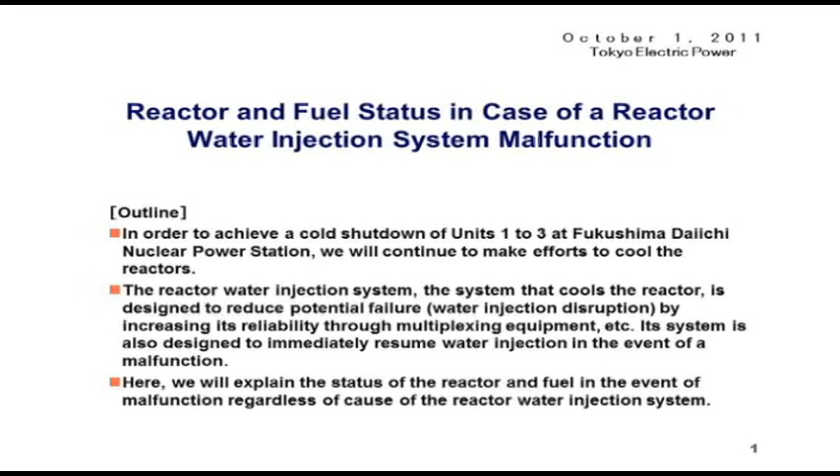Basically, we have backup facilities for the feed water system, such as spare pumps, emergency power source cars, and firefighting vehicles, so that we will be ready to restore the system immediately. Today, we will introduce what will happen and how we should respond when the system does not function in spite of those backup facilities. As illustrated at the bottom of the slide, first let me explain some of the images depicting the state inside the reactor when the feed water system is disrupted. Given that this is just an image, please understand that this is just a rough depiction of the state at the bottom of the RPV.

First, at present, the words normal time are displayed on the left-hand side. However, we estimate that the damaged fuels dropped down to the bottom of the RPV. At present, it is both through the water injected and the water leaking out through the bottom combined with its evaporation that we are able to remove the decay heat. Therefore, we presume that the current temperature and pressure level of the RPV are well balanced between the amount of water injection and the combined amount that is evaporating and leaking out.

Please look at the illustration in the middle. If the water injection is disrupted under any circumstances, the water level will lower due to the shutdown of water supply. As a result, the amount of fuels exposed increases. Following this, we presume that the longer this state continues, as described on the right-hand side, the amount of water will almost reach zero, and the amount of exposed fuel will increase further, raising the fuel temperature.

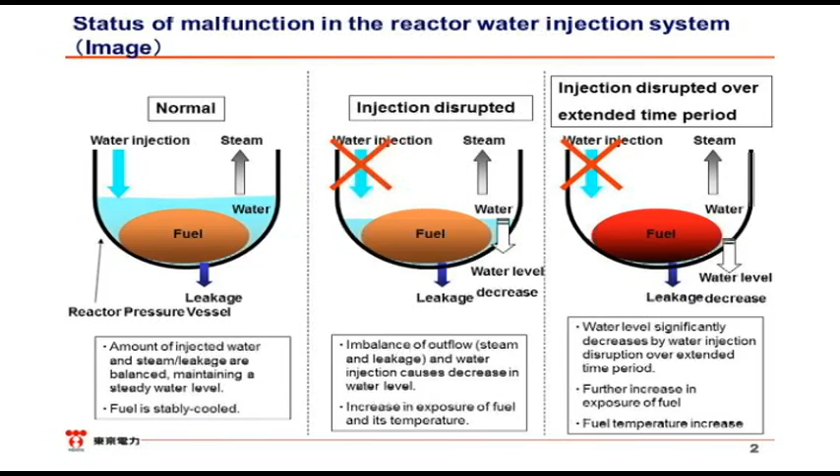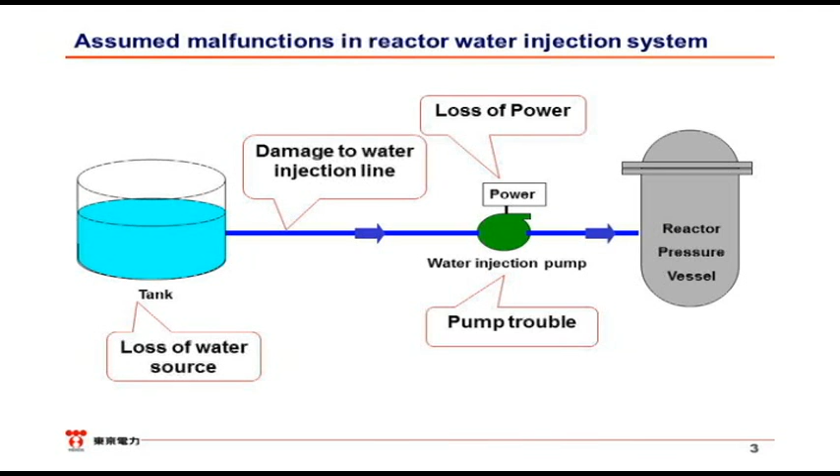We will describe what we think occurs when the water injection system fails. In principle, we will continue the water injection sourced from the water tank via the use of a hose through the injection pump into the RPV. We think the possible reasons for the failure are as follows: pump trouble, problems at the system that supplies electricity to the pump, damage to the feed water line that leads to water leakage, and as for the water tank, the loss of the water source that supplies water for injection. In case of failure, let me explain our response measures.

First, when pump trouble occurs, we start up a standby pump or activate an emergency pump that has been installed on the upland grounds. Second, in the event of AC power loss, we will resume operations of the emergency pump that we have on the upland grounds or restart water injection by using a firefighting vehicle that doesn't require electricity. Upon the loss of the water source, we switch over from the buffer tank to the filtrate tank in order to resume the injection. Though we didn't put it here, we have another injection tank so that we can attempt a water injection just in case.

If the feed water line was damaged, we resume water injection via a pump that is installed next to the pure water tank or via a hose that we have prepared for the accident along the regular line. As we have described so far, in the event of a single failure occurring, we are able to restart the injection within approximately 30 minutes.

Relating to the evaluation of the reactor situation in the event that water injection is stopped, we assume that all of the decay heat contributes to the increasing fuel temperature based on the conservative evaluation of the condition that the reactor was in an adiabatic state. Actually, we expect that heat removal of the fuel will be achieved due to the evaporation of injected water since the water injection stopped, as shown in slide 2. Meanwhile, this time we conducted an evaluation based on the condition that all heat released in the reactor contributes to increasing fuel temperature as soon as the water injection is disrupted.

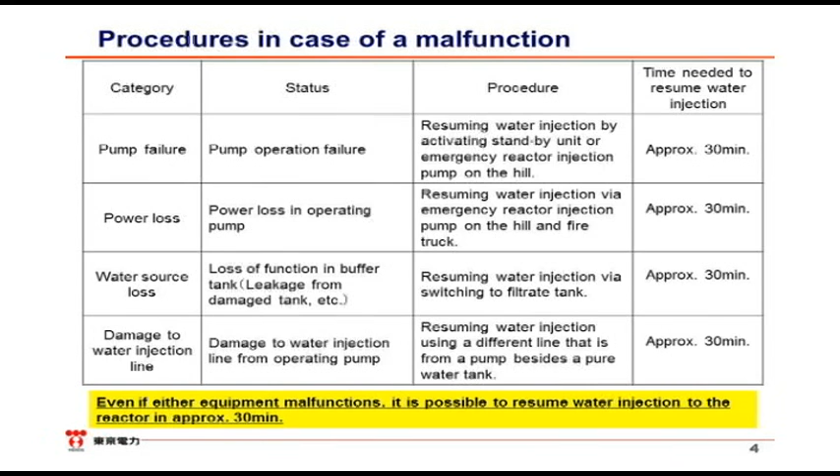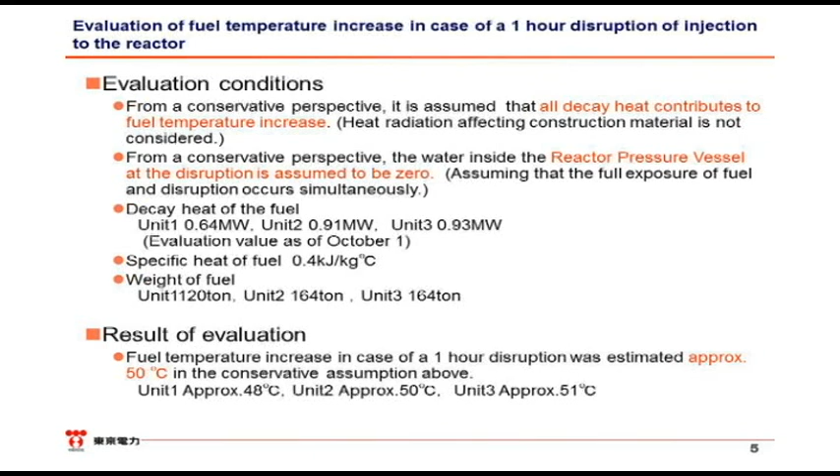Although we explained that we will resume water injection approximately 30 minutes following the disruption of water injection, we additionally explained how we would respond in the event that multiple facilities were damaged, as shown in page 6. We have to resume water injection by relocating fire trucks or hoses in the event of a tsunami hitting again due to a strong aftershock that destroyed multiple facilities.

According to this flowchart, after the functions of the multiple facilities were lost, we relocated the fire trucks, confirmed the current situation of where the hoses had been laid out on the ground, and conducted an environmental survey. After that, we expect to restore the hoses and resume water injection to the reactor following equipment installation. We assume that these steps will take approximately 3 hours.

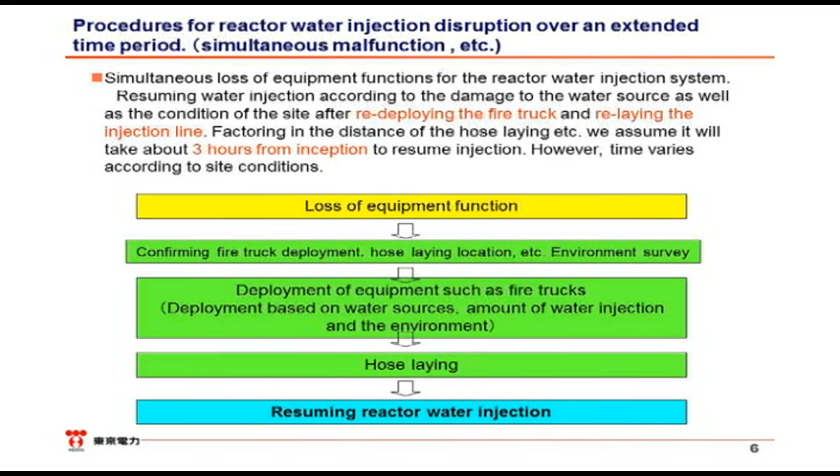Therefore, we assume that the fuel temperature will increase by approximately 150 degrees Celsius in the case of an approximate 3-hour water injection disruption. What will happen in this particular situation is shown on page 7. In case water injection is disrupted for a long time, we assume that the oxidative reaction of zirconium with water will escalate due to the rise of fuel temperature.

Based on the assumption that the fuel temperature at the earlier stages was 300 degrees Celsius, it will take approximately 19 hours for Unit 1, approximately 18 hours for Unit 2, and approximately 18 hours for Unit 3 until the temperature reaches 1,200 degrees Celsius, where oxidative reaction of zirconium with water will escalate severely. Therefore, we have to resume water injection during the 3 hours since the water injection was disrupted.

Additionally, we evaluated that a significant volume of zirconium inside the reactor was already used at the accident on March 11th, because this assumption concerning reaction time is that of the normal situation of the reactor. And we consider that the oxidative reaction of zirconium with water is unlikely to occur if water injection is not being done. Therefore, we consider these assumptions to be on the conservative side.

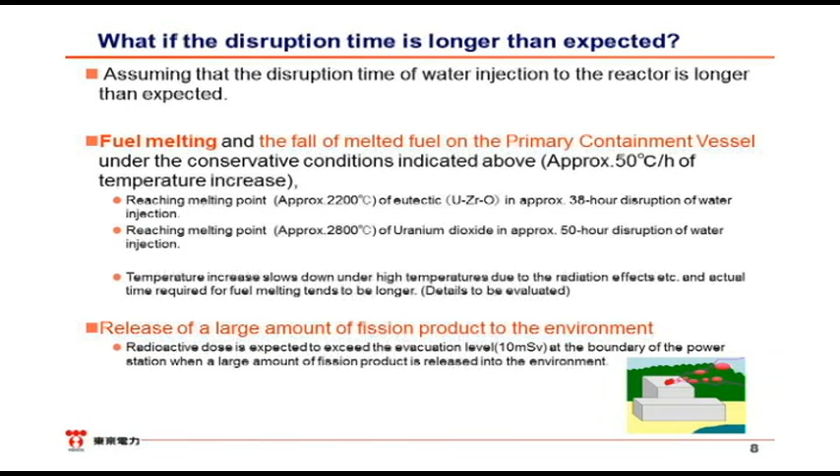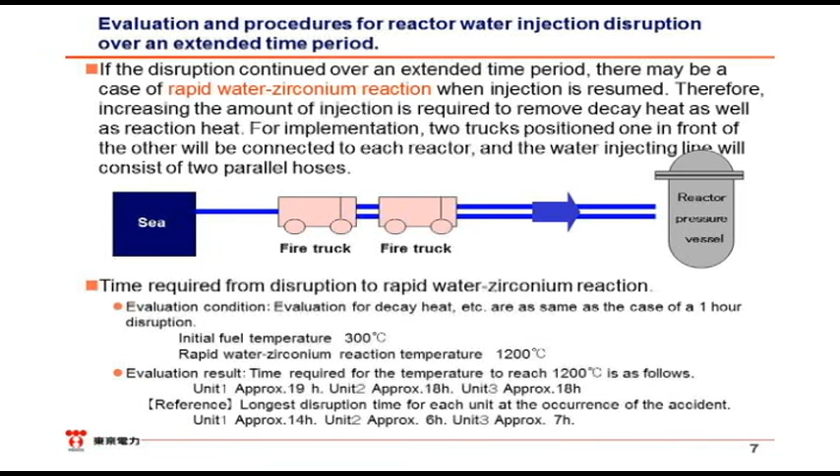Water injection was suspended for the following duration per this accident, as shown at the bottom of page 7: Unit 1, 14 hours. Unit 2, 6 hours. Unit 3, 7 hours. Given its importance, we will continue to improve the reliability of the water injection system.